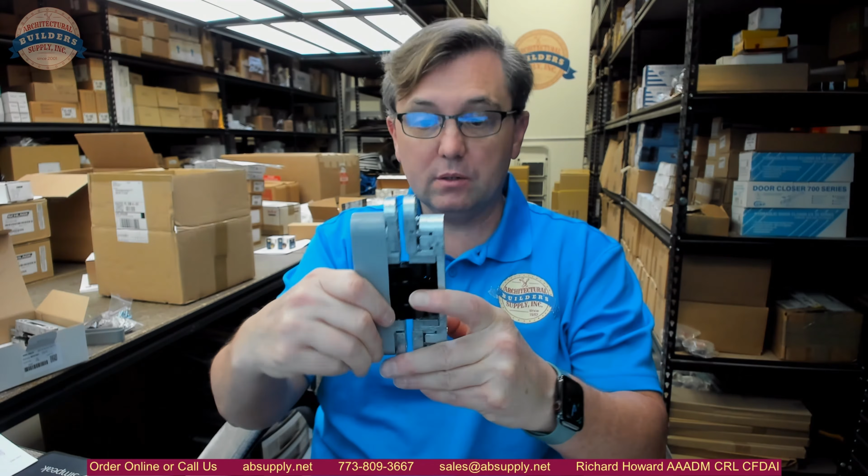I've reviewed other concealed multi-adjustability hinges from other people, and they all pretty much work the same way. They're going to allow you a little bit of adjustment this way, this way, this way, and that's certainly nice to be able to do that. A lot of people swear by the ability to adjust the hinge after installation. You know, the bottom line is if you're installing it exactly per the template, there's no need to adjust.

The issue with that logic is, you know, things fatigue with time. A door moves a little bit. The hardware gets a little worn, and now it's not perfectly straight. And I would look at the ability to adjust as a double-edged sword. What is that hinge like maintenance-wise when you add the ability to adjust? Do the adjustments themselves come loose, you know, at year 10? Does the hinge fatigue to the point where you can bring the door back up or however you need vis-a-vis those adjustments and it being a worthwhile sort of product?

I've really never seen a concealed hinge like this fatigue with time. I did coincidentally see one yesterday, not unlike this hinge, but the entire assembly of laminated plates literally sagged from one leaf to the other. And I said to the contractor, was someone doing chin-ups on the door? And he may not have understood what I said, but then proceeded to tell me that it is a door that has a bookcase on the back, and he knows that the owner's children literally crawl up to the top of the bookcase and sit on the bookcase, likely adding 80 pounds to the weight of the door.

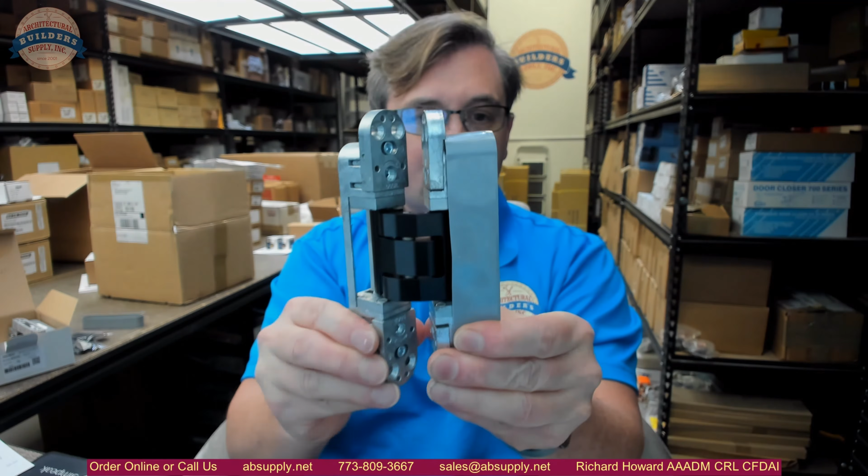The other downside is that you have to think about special templating when doors are hung on these hinges because of the vertical axis of pivoting and how it floats. That silver pin represents how the axis of pivoting actually moves through a slight arc through the opening and closing cycle. A hinge barrel, that vertical axis of pivoting is plumb, doesn't move at all as the door opens and closes. With concealed hinges like this, they do.

You have to be mindful of your other hardware. And what I'm in particular thinking of would be overhead stops. If you're doing an upscale residence, I've done jobs with concealed hinges and overhead concealed stops. Super elegant because you've got a large apartment in Manhattan where you have a relatively large space, but everything is kind of compact. And you'll have conflict of doors opening into a commode, opening into another closet door,

floor stops, hinge pin stops. You're building a $4 million condo. You're not using $3 hinge pin stops. You can't use them with this, obviously, anyway. So you have to be mindful of how a concealed hinge with a floating vertical axis of pivoting will affect your other hardware. Overhead stops is the piece of equipment that comes to mind.

So let's continue on, switching to the screen view, and let's go over the extended description, its hinge capacity, what you're going to use and when. We're going to dive into the documents. We're going to talk about how to install it. I've mortised for these. Like I said, the first time I did it, I spent a half an hour looking at the template. I was, in my mind, incredibly sure of what I was about to do. I did it, and it worked perfectly. And after that, you graduate right to expert level. So let's move on to the screen view of this video.

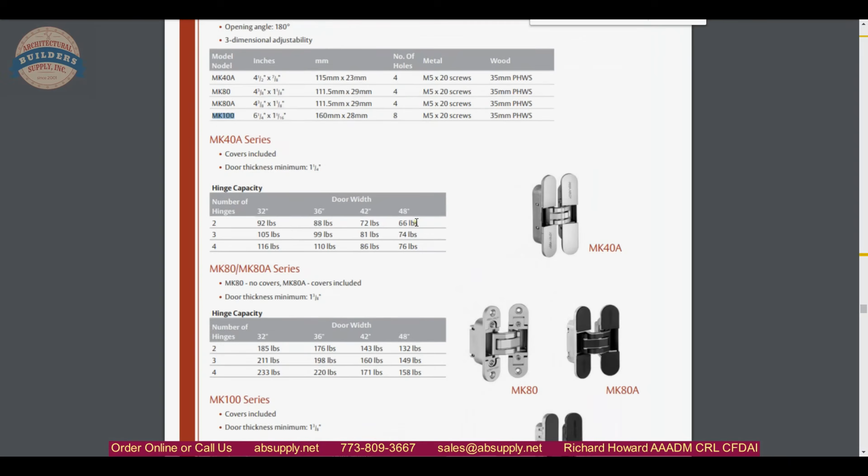Okay, so here's the item that we're looking at, and let's dive in and take a closer look at it. The MK67001. First, what I want to do is take a look and see what other options they have. I thought that they had more than just one option on that hinge, but it's not coming up. In their catalog, they call it MK100. There they are. You just have to know what to call it to find that it'll come up. So they have a variety of concealed hinges.

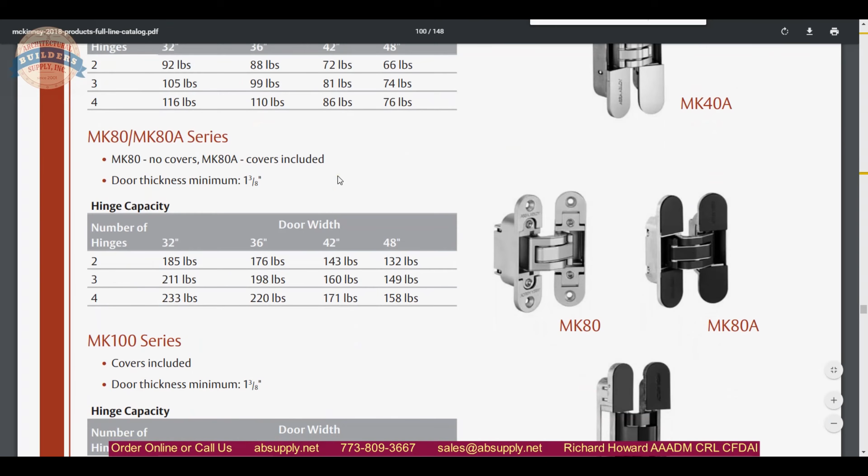This document is very handy, and I'm sure that this is linked to down below. Different weight capacities is really what you're dealing with. And what is nice about these hinges is that there is a relationship between the quantity of hinges you are using and the total possible weight of what you'll hang. The good news is, doors that you're faced with, 3070, 3080, 4080, typical 1 3/4 hollow metal wood doors, they don't exceed what these hinges can handle generally, okay?

Even if you had a 4080 solid core door, a 4080 solid core door is going to be 4 times 32 times about 6 pounds per foot. So that's not right. I said 4 times 32. I meant 4 times 8. 192 pounds. So even a solid core 4080 door is not going to exceed what they're meant to handle. Okay, so you're probably going to be in good shape.

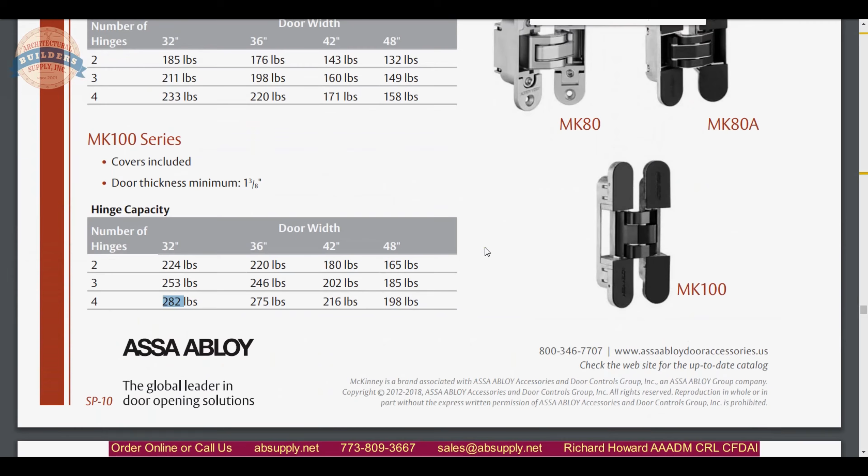What's nice about hinges like this is where they stop working in terms of door weight, other hardware stops working too, like door closers. Door closers that are surface mounted don't work well on doors that are 250 pounds plus. So this catalog cut is really nice because it will show you quickly what's happening with these other hinges. Okay.

Refined minimal, 3-dimension adjustability, easy installation. That's subjective. They're easy to install. You have to know how to mortise them, and you'll be able to do that by the end of this video, I hope. And door alteration. Snap-on covers conceal set screws for a clean aesthetic. This is certainly a concealed hinge. The base material is zinc.

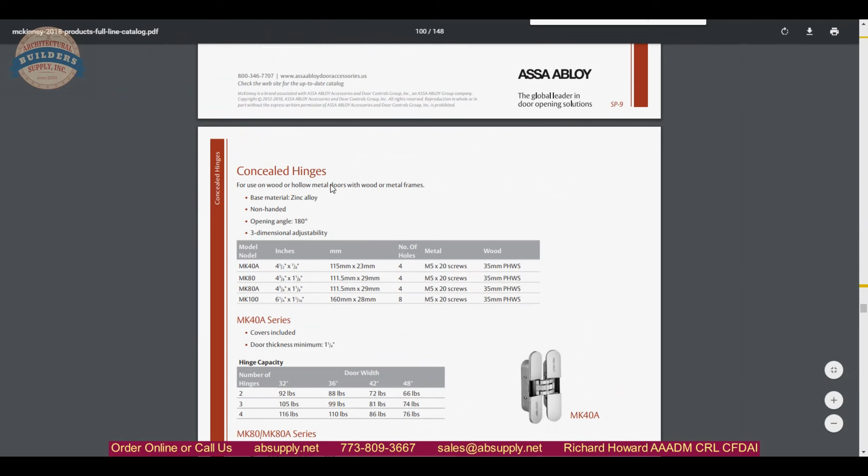Now, where you'll get into trouble with hinges like this is there's one thing that is conspicuously missing. And what is conspicuously missing is no reference to UL listing. So the problem that we have here is using these on fire-rated doors. So that would certainly be a downside of this material.

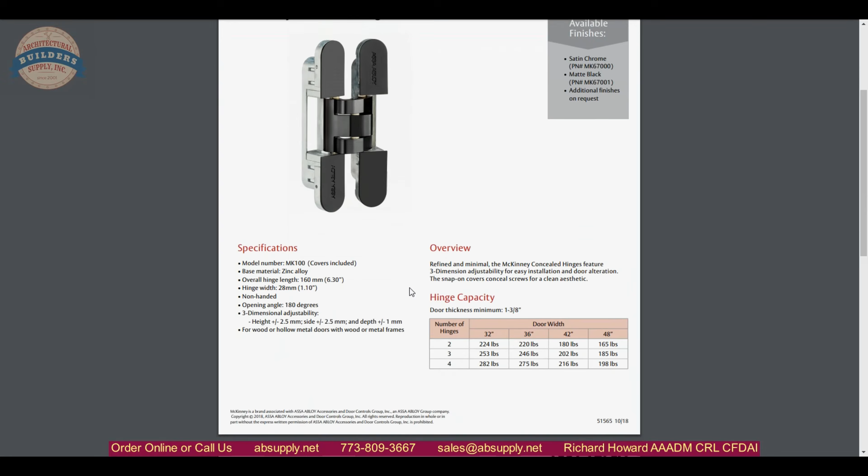Unfortunately, you won't. Using this on a fire-rated door would be expressly prohibited, is the bottom line. Now, I don't think you're going to encounter that problem often. The trouble is you'll have a client who will want to use these hinges throughout a space. And the issue is the majority of the doors will not be fire-rated, and you might have a couple that are, which puts you in a position of not being able to use a beautiful concealed hinge like this throughout. Okay, so be mindful of that.

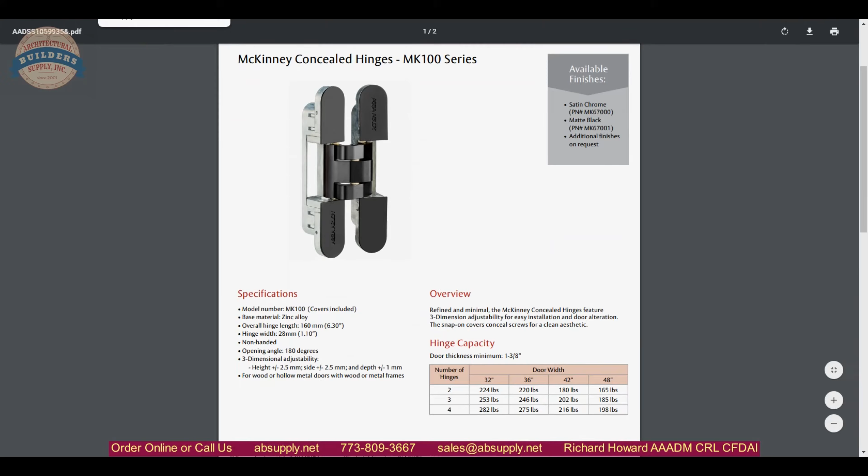Let's get back to our description. Matte black, that's the color of this hinge. An overall size, and we're going to dive into the installation instructions and go over all of that. These are non-handed. They can swing left or right, left-hand reverse, right-hand reverse bevel. 180 degree is permissible on the degree of opening of the door, provided that there is no conflict with casing, a wall condition. The hinge itself will go to 180. Okay, with the adjustability here expressed in millimeters. We'll show that. We'll demonstrate that.

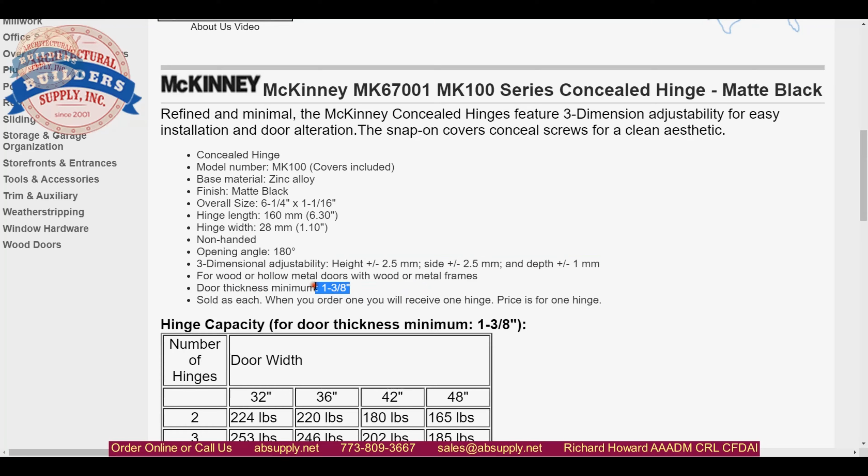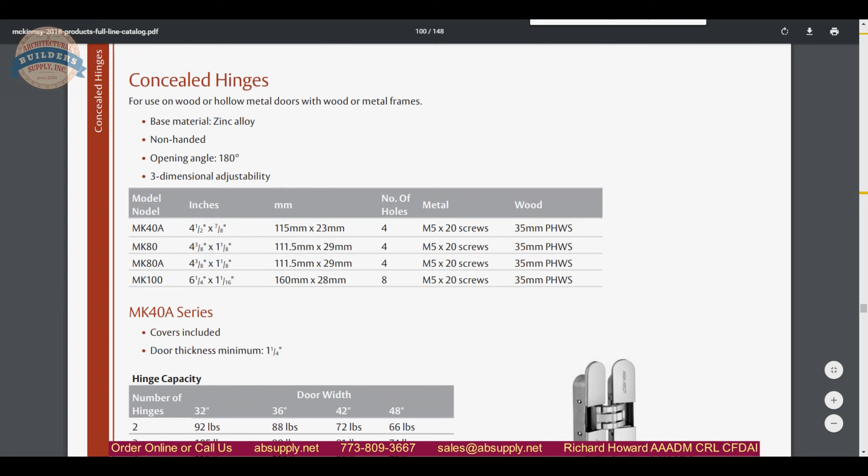You can use it on wood or metal doors, wood or metal frames. Your minimum door thickness, however, is going to be 1 3/8 for the MK100. Okay, they have their other hinges here that will allow you to get to thinner doors. The MK40, 1.25 inch, MK80, MK100, 1 3/8. Okay, your door weight capacity, which is here as well. Now let's move into the supporting documentation.

Okay, so we're back here at our supporting documentation. Let's click on product brochure. That's going to, of course, show us an overview of McKinney hinges. And that's a nice document because, quite frankly, it's going to show you hinges that are depicted in a very consolidated 8-page document, and will take you through a tour of really cool hinges that you may not have known were available.

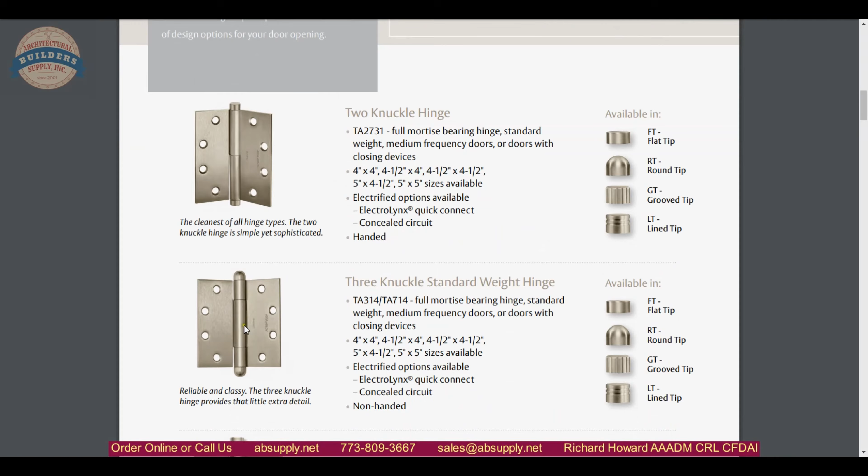And what I mean by that is McKinney will give you these 2-knuckle and 3-knuckle hinges along with a heavyweight version. However, the standard weights have these beautiful decorative tips. Modern decorative tips, not your typical ball tip, urn tip, steeple tip, acorn tip. These are quite modern. These aren't your grandfather's decorative tips. Okay, so you'll continue through here. Then you've got a 5-knuckle standard weight. This is, of course, your go-to hinge.

Modern options compared to the classic, the most common ball tip, steeple tip. That's nice too. You don't see those all the time, but they're kind of cool. I think you need to have more of a Victorian look to have steeple tip, but use it. If you like it, that's good enough. Heavyweight version, so a much thicker hinge. Decorative 2- and 3-knuckle hinges.

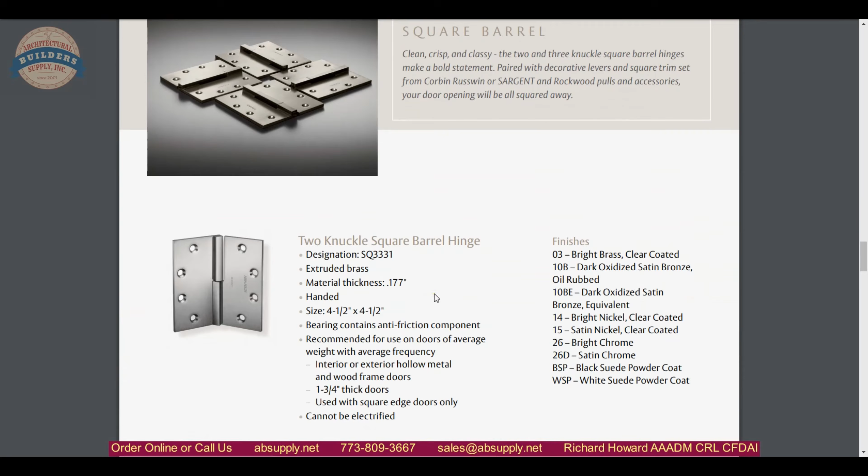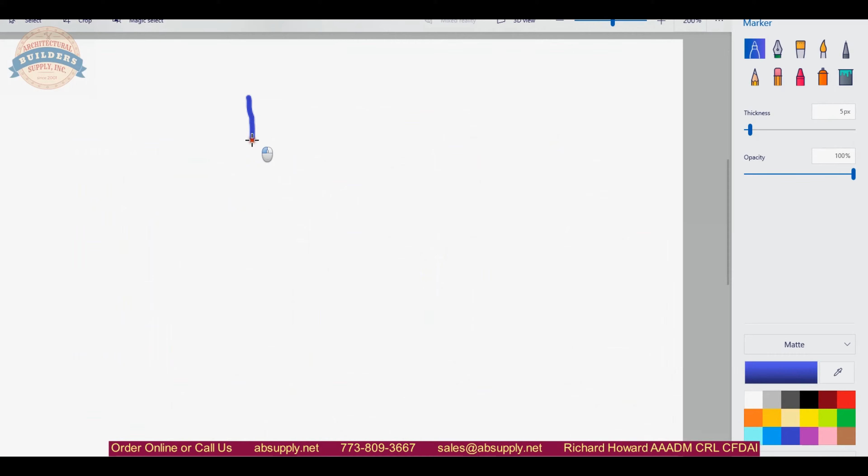Now, these are cool. Square barrel hinges. They don't really show a great picture of these here at all, unfortunately. But here, let's just try this. A square knuckle hinge, from a cross-section perspective. Okay, so when you look at that door in elevation, all you're seeing is this really cool square profile.

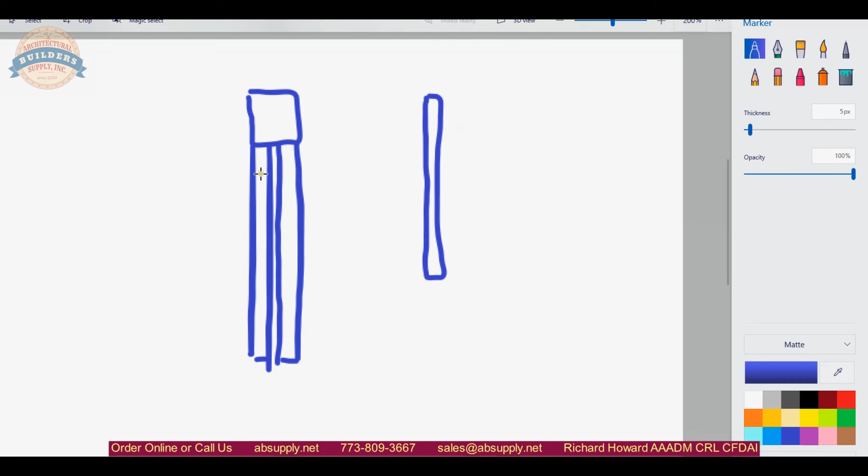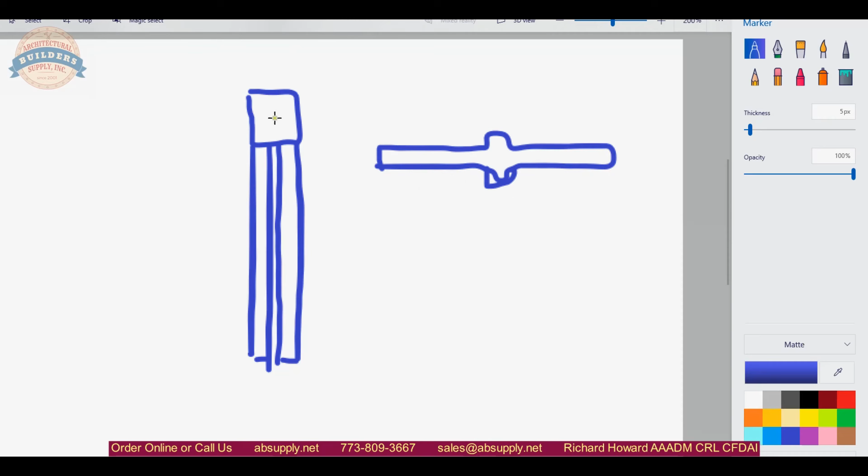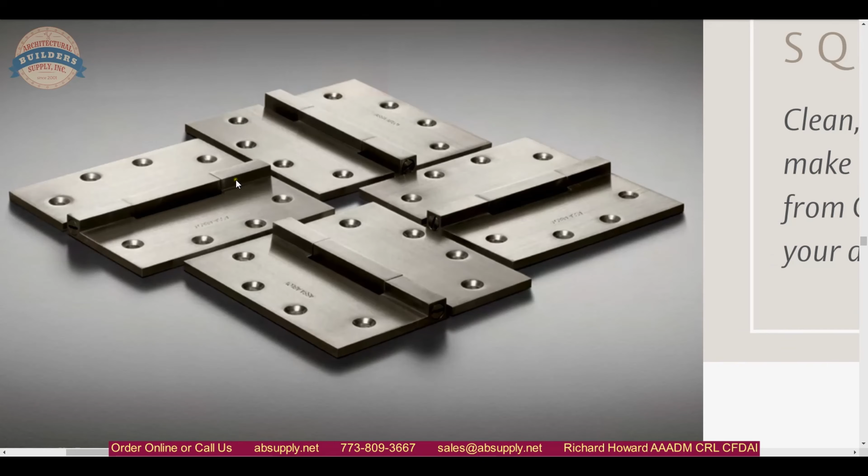The factory does need to know if your doors are square-edged or beveled, because the swag that they will put on the hinge leaf is dependent on whether it's square or beveled, because you don't want the hinge to be disjointed, for the barrels from each leaf to not be completely in line with each other. So if you use your imagination with these square barrel hinges, you can see it a little bit better here. These need to be lined up, and the swag that they're going to put on the hinge leaf underneath is going to be based on square or beveled edge. So be sure to qualify that.

I did 1 or 2 jobs with these. They were really cool. Don't sell a lot of them. I wish we sold more because I think they look great. Now, we move into their concealed hinge offerings. Their olive knuckle hinges, which are really cool as well. That's very much a 19th century sort of hinge. But what really drives home how beautiful their architectural hardware looks is what they're doing here. Black suede powder coat, white suede powder coat. They're accommodating these requests for these custom finishes.

There was a marketing document put out by Assa Abloy, who is the parent company of McKinney, Rockwood, Pemko, Sargent, Medeco, Yale, Corbin Russwin, Norton, on and on. And that document basically said, get a piece of paper and email us what you're looking for, your custom idea. And if we've got the machinery to make it, we'll be happy to. And we'll probably be able to give it to you in any finish you want as well.

So in this regard, McKinney, a la Assa Abloy, making all of these custom variations, these beautiful derivatives from standard builder's hardware, to attempt to meet the demands of the market is, in my opinion, a renaissance.

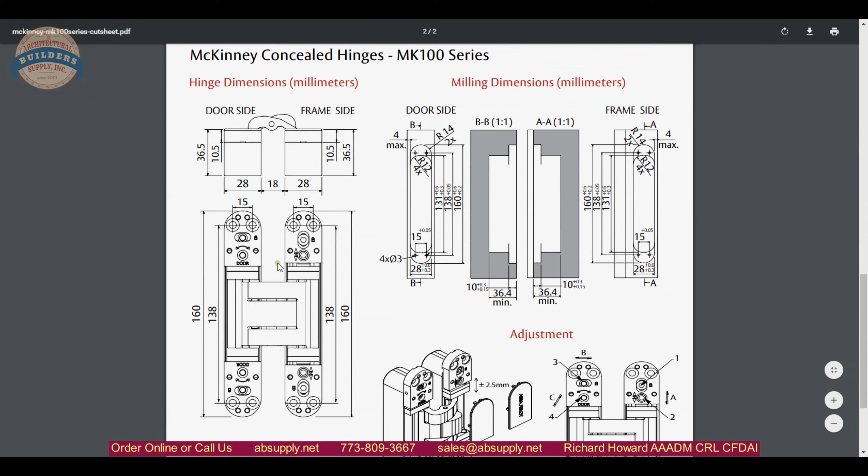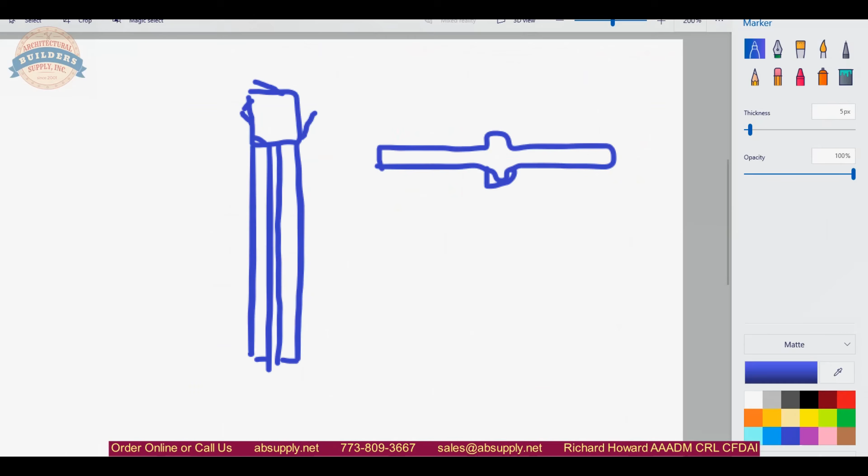Okay, a review of everything we've discussed. We'll also touch on some basic dimensional properties, because these are questions that are asked immediately. What size is it? How big is it? I'm seeing obviously things in metric here, so converting is going to be important. If you are of a certain age and you don't speak metric, that is understandable, because I didn't either. But we have to work in this ever shrinking world.

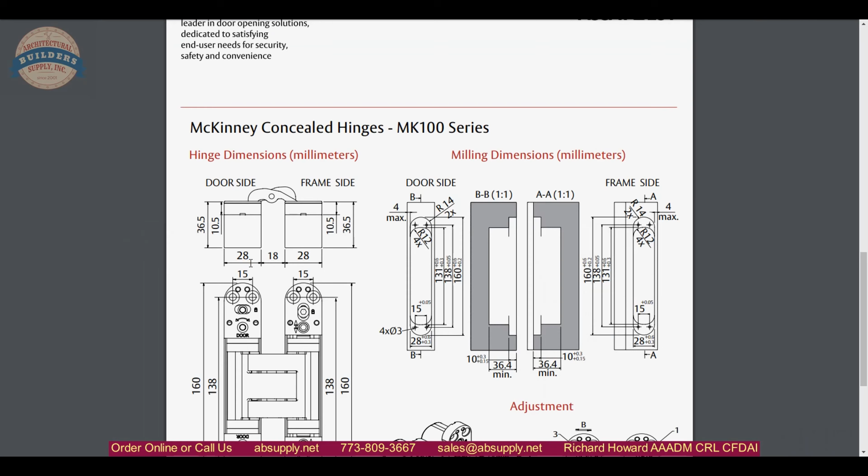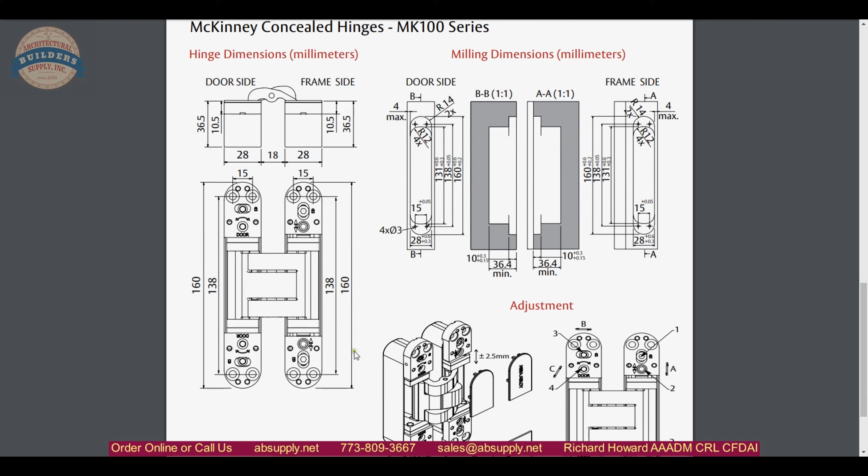One thing that I like to do, for those of us that don't find metric our first method of measurement, let's just say 160 millimeters overall height. Okay, great. I don't know, how big is that? A foot? A mile? So it would be 160 divided by 25.4. 25.4 millimeters per inch. Doing the math, that's 6.29 inch. So what are we really looking at here?

6 1/4 is 6.25. That would be 6 4/16. That would be 6 8/32. That's going to be about 40 thousandths bigger. So 6 8/32 would be like 6 9/32. Well, 6 9/32. Okay. So if we went 1 divided by 32 times 9 plus 6, that's going to give us 6.28 inch. So that's going to be really close to that.

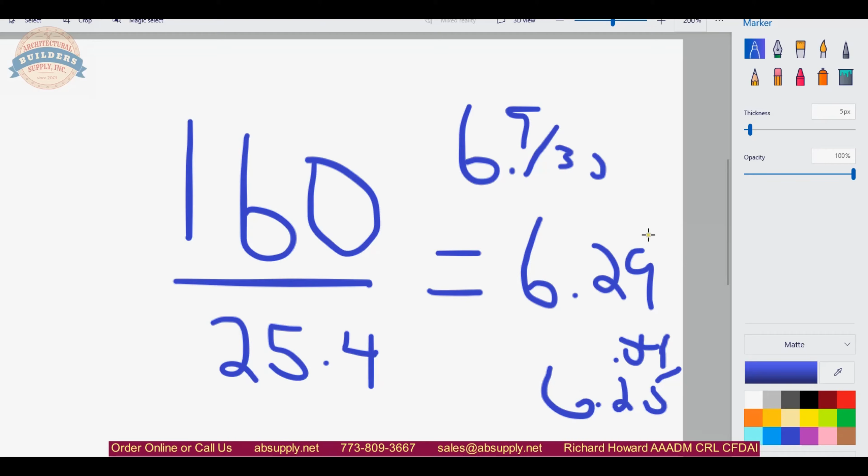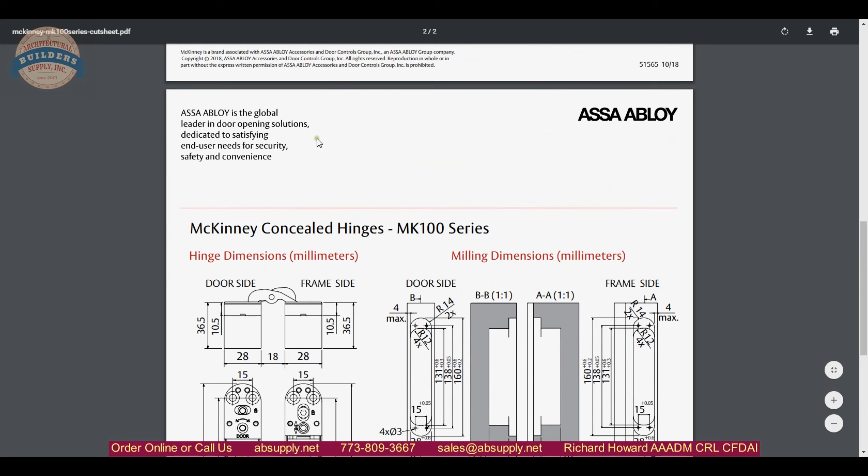So that's just the methodology I use to go about converting things from metric to imperial. You know, whatever. We have to work with the information given to us. Being a very European hinge in origin, we can understand why it's in metric. But there you go. Okay. Installation and structure, or a dimensional overview. And indeed, the next document for us to get to is going to be our installation instructions. Oh, that video is there. Okay. There you go. Very handy.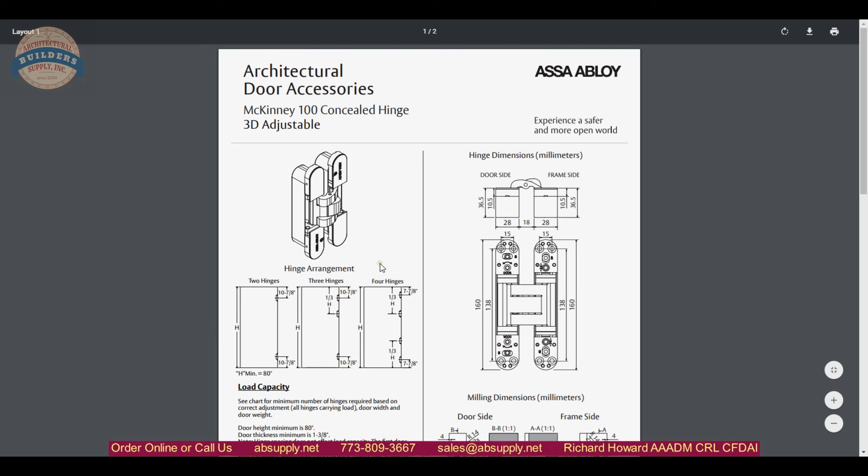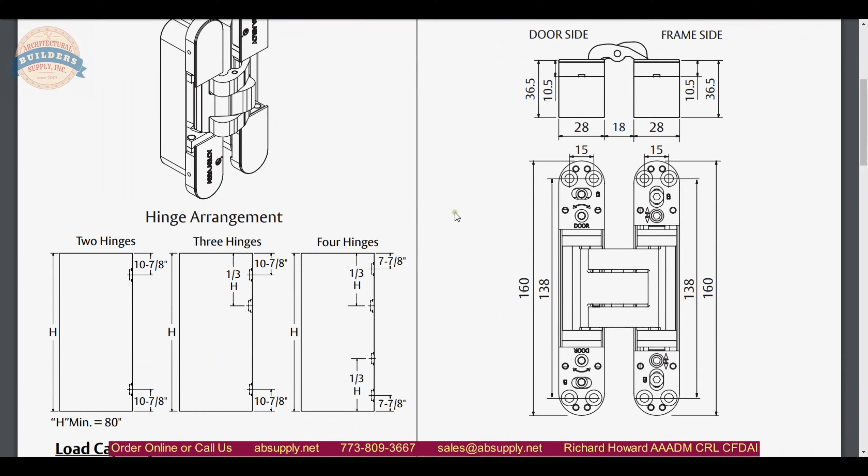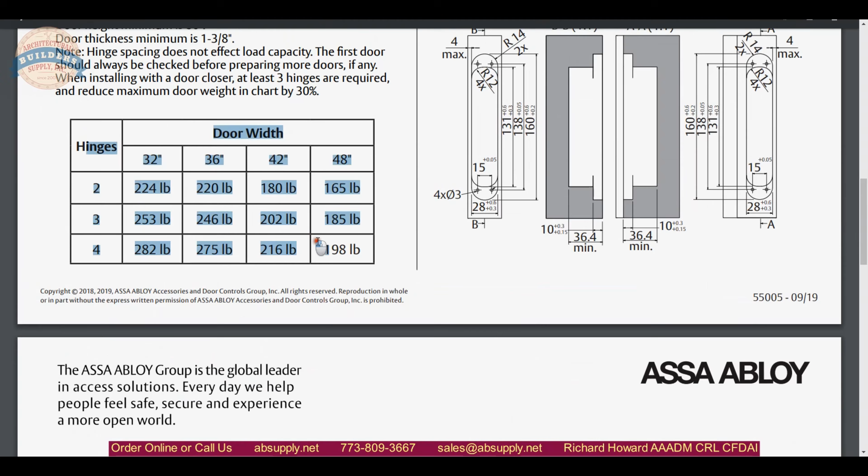Installation instructions. Let's just dive into it. We do indeed have our installation instructions pulled up here, and McKinney does a good job of really distilling this down into the essence of what it is that we're really dealing with. What's important to know is that it's atypical in terms of installing these hinges in most applications, meaning typical construction, and the way that the hinges have been tested is compliant with how they're asking you to position them. 2 at the top is what they're saying.

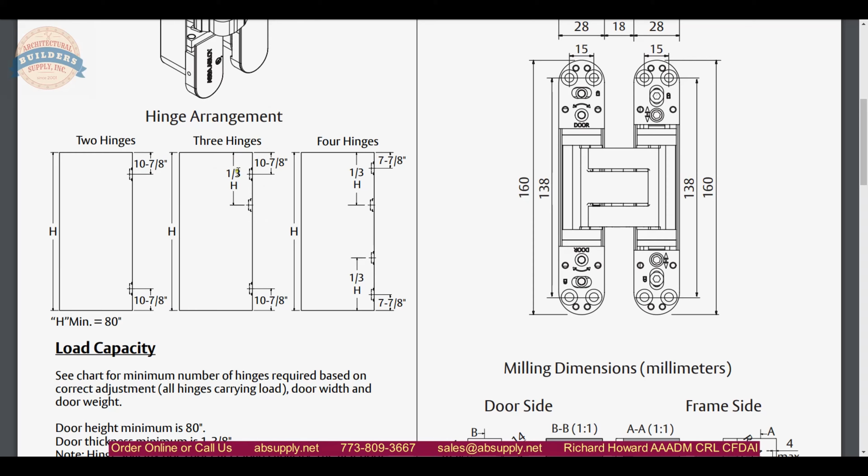If you're in Europe, or on a cruise boat, because many cruise boats are manufactured in European shipyards, you'll always see 2 hinges at the top, and that is the opposite way of how we do it. Unfortunately for us and our pride, this is the better way to do it, because 70% of the weight of the door is hung on that top hinge. So you really want to have more hinge at the top of the door than being in the middle. It's more effective at carrying the load when it is closer to the top.

They're saying 1/3 from the top. It would not harm you to go further to the top. However, I would absolutely follow the guidelines of what the hinge is calling out. The issue that we have, though, is if you're doing wood doors, and you very likely are, I would get it in writing from your wood door manufacturer that installing your door with these hinges will not violate their warranty. The rope that they could use to hang us with would be that the door is improperly hung. So I don't know if this hinge is defined as improperly hung.

So you'll want to be clear and upfront before you order 30 doors for these hinges, and you've got 5 of them that are warped. And then the door manufacturer comes in and says, well, I'd love to help you, but you don't have the door properly hung. And that's just a very, very bad position for all parties to be in the middle of.

So I would clarify that, and I say that because I've been involved in those types of conversations where, yeah, it's center hung pivots. The manufacturer's not going to warrant that door if it warps. And sure enough, 1 out of 10 doors are warped in my experience, my actual door manufacturing experience.

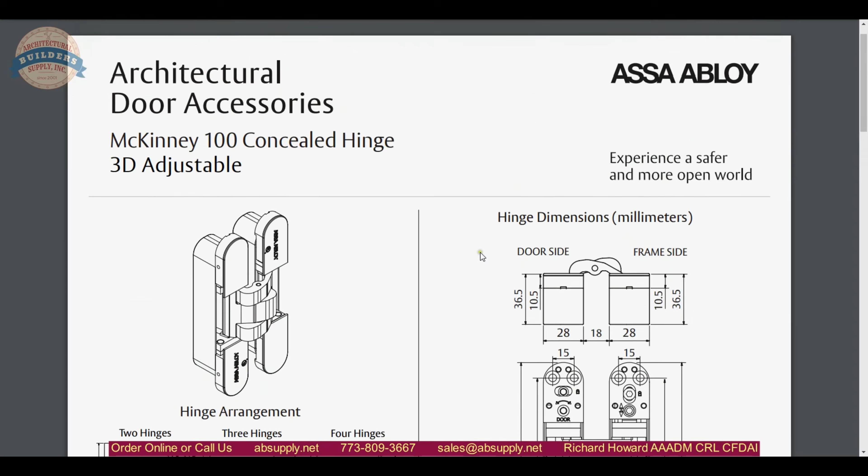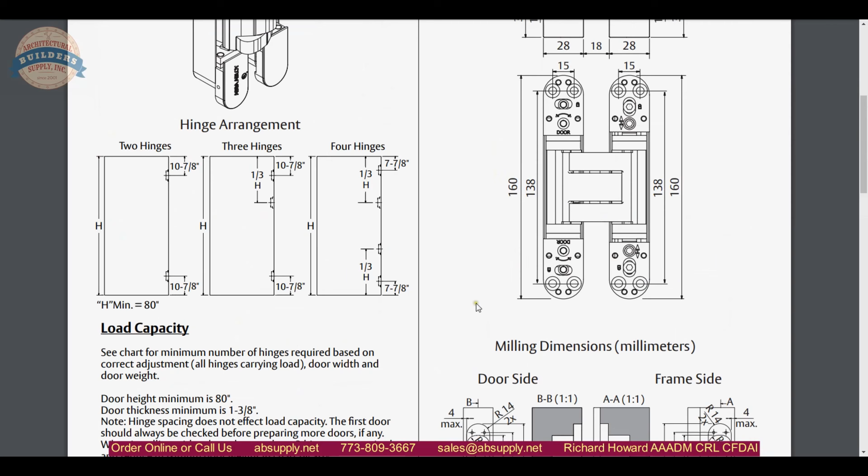So as we get our overview of what we're wrapping our head around, here's your hinge arrangement. Here are your dimensional properties. Okay, these dimensions are important to know, but it's when we get down here where they're really important to know. Actually, everything we need is right here. Okay, so minimum door height is 80 inch. Door minimum thickness is 1 3/8.

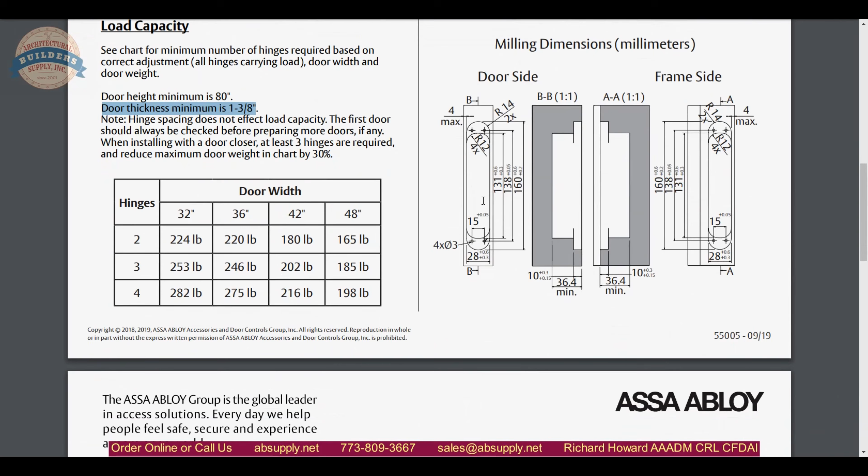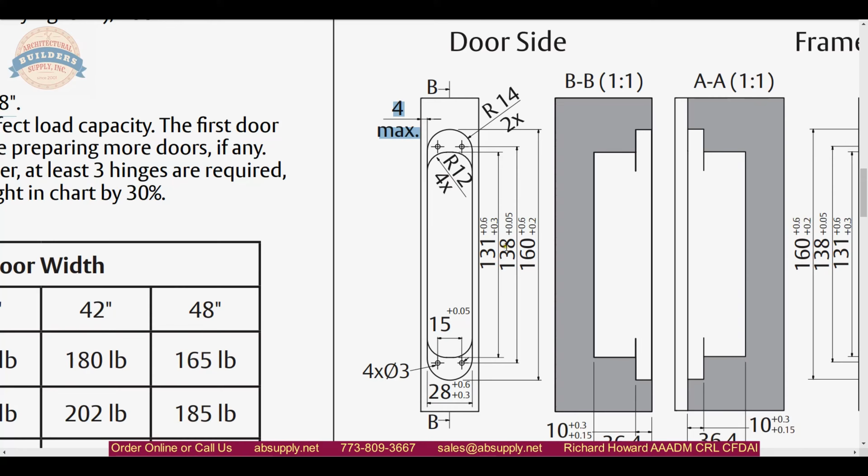You can hang a 15-inch thick door on this. It doesn't matter, in the sense that you need to observe a hinge backset for this to work on all these hinges, and where that comes into play is a 4 millimeter maximum backset. So provided that you observe that 4 millimeter maximum... switch back to this. Here is a rough drawing of that hinge.

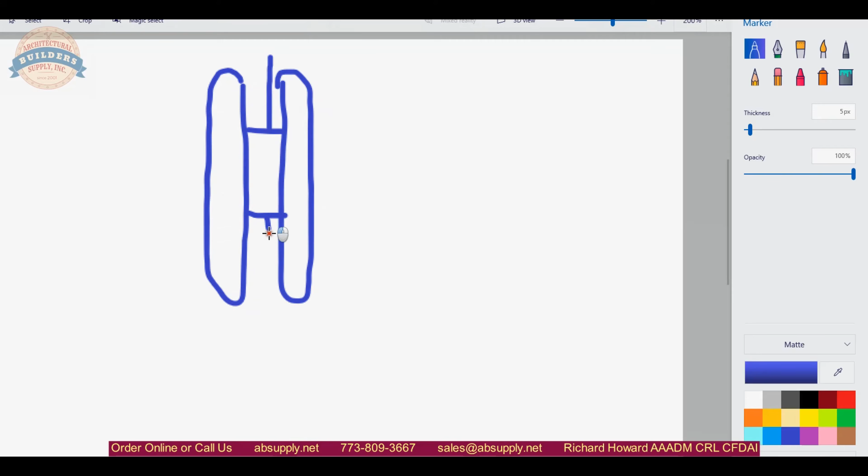Okay, your door is going to come in here at your door, and that's your frame. The dimension in here cannot be exceeded, otherwise the hinge isn't going to open. So they have to have the hinge leaf fairly close to the edge of the frame and the door in order for that to work, and the maximum dimension of that is 4 millimeter.

If you made that larger, you would definitely find yourself in a position where the door will not articulate into its opening cycle, because the hinge is installed so far that the door will make substantial premature contact with the jamb. Hinge spacing does not affect load capacity, so that's an important note to have. The first door should always be checked before preparing more doors. When installing a door closer, at least 3 hinges are required, and reduce maximum door weight in chart by 30%.

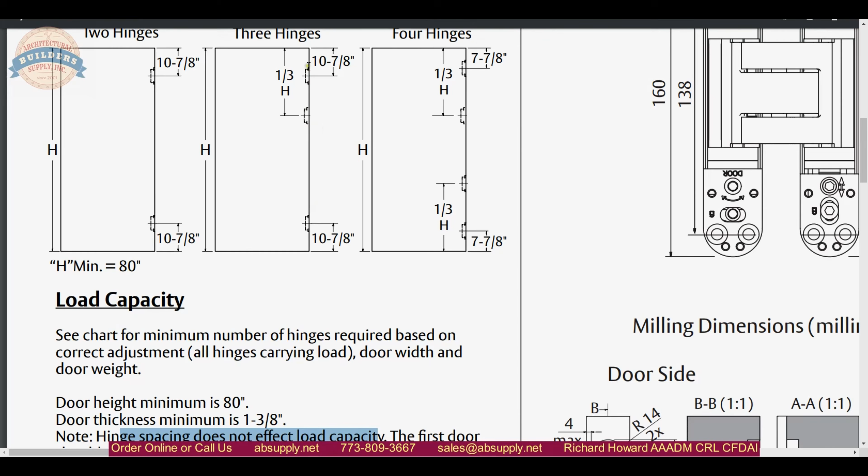So they're saying if you're going to put your hinges in the traditional top, middle, bottom arrangement, that does not affect your capacity. I would say, though, it would affect the hinge's ability to be as efficient as possible. If you were to install a hinge here, here, and here, and then top, middle, bottom, and cycled it for 20 million cycles, I think you would see different wear patterns on that top hinge. Does that really matter? Probably not. But they're calling it in this arrangement for a reason, while also saying you're not going to affect your capacity based on hinge spacing.

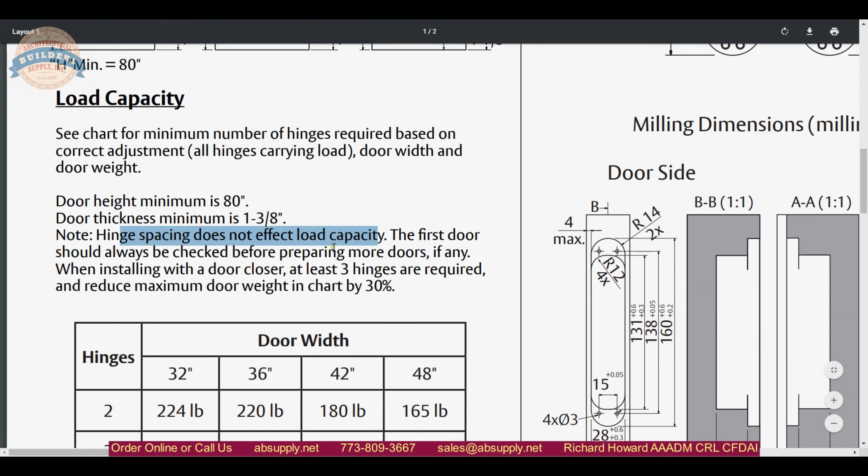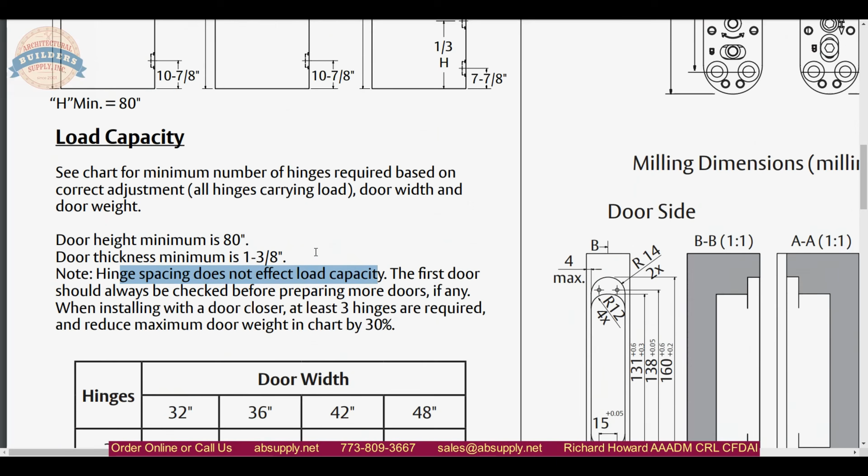Now, obviously that is to be taken with an understanding that you're going to install the hinges at a standardized location. If you put one here and one here and one here, you could definitely affect the operation of the door. Now, why are they saying a door closer reduces the weight capacity by 30%? Because a door closer puts substantial additional force onto the hinges. So if you have a door closer installed, you will need to adjust these numbers by 30%. So be mindful of that.

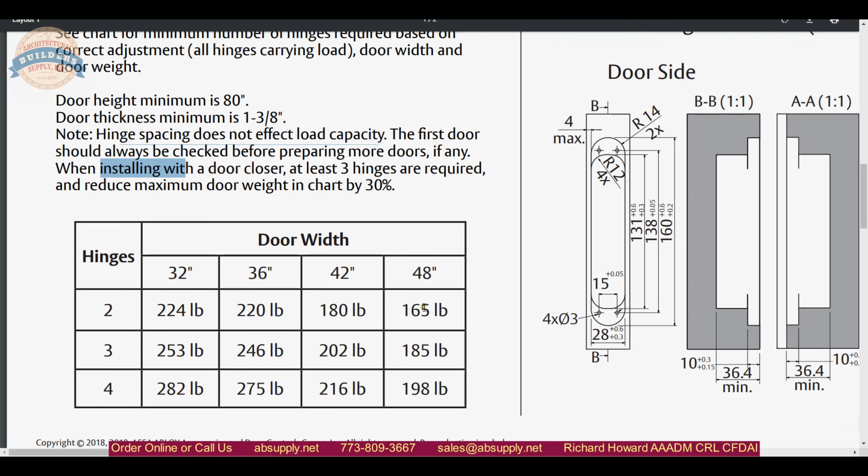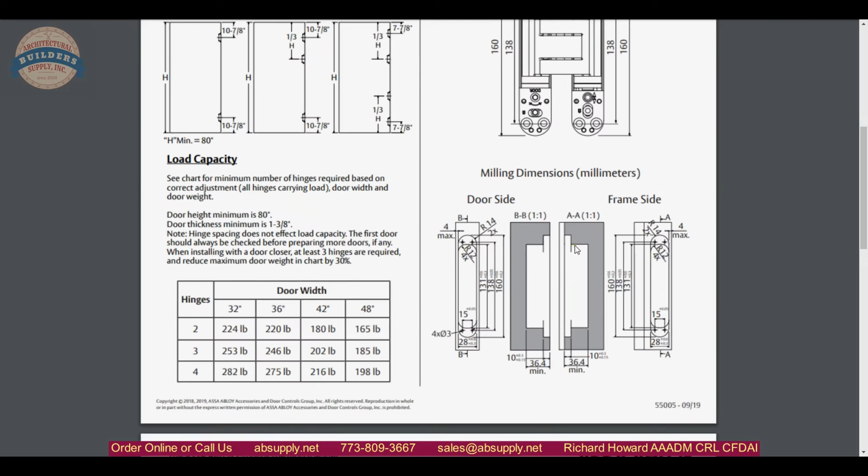Okay. Now let's move into an overview of these dimensions and talk about how to go about actually machining the material, really the mortising. The installation is basically a two-step prep, meaning you just need to make the preparation in the edge of the door and the frame look like this in cross-section, with this width of 28 millimeters. The overall width from here down to here is your 160 millimeter. This 138 millimeter tells you the center of your screws, but you're not mortising anything for that. You've got 28 millimeter wide.

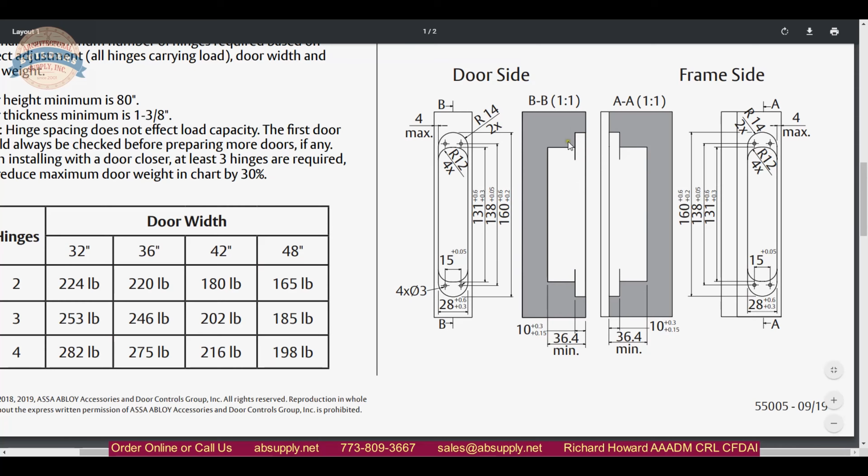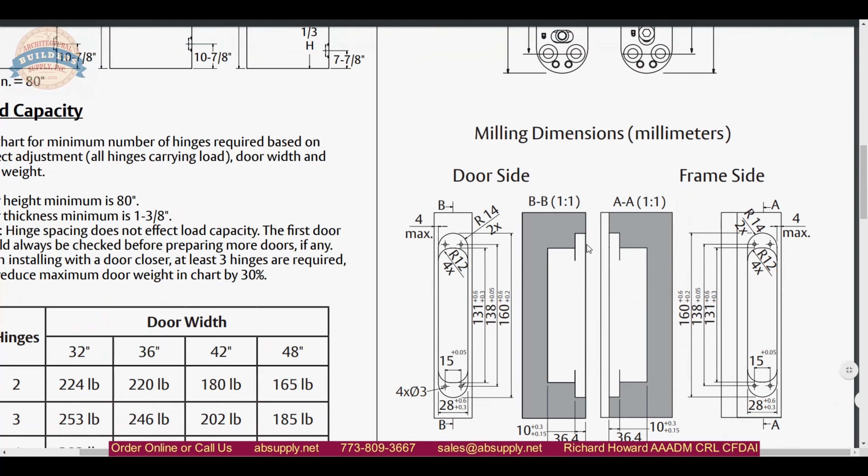You have two dimensions here because you have two preparations. We're going to call this shallow one the plate, and this deeper one the body. Your body prep is going to be 36.4 millimeter deep, and your plate prep is 10 millimeter deep. The question becomes, what is the length? We know this is 160 millimeter here to here. We know it's 28 millimeter wide. What's our next dimension? Well, it's literally right here.

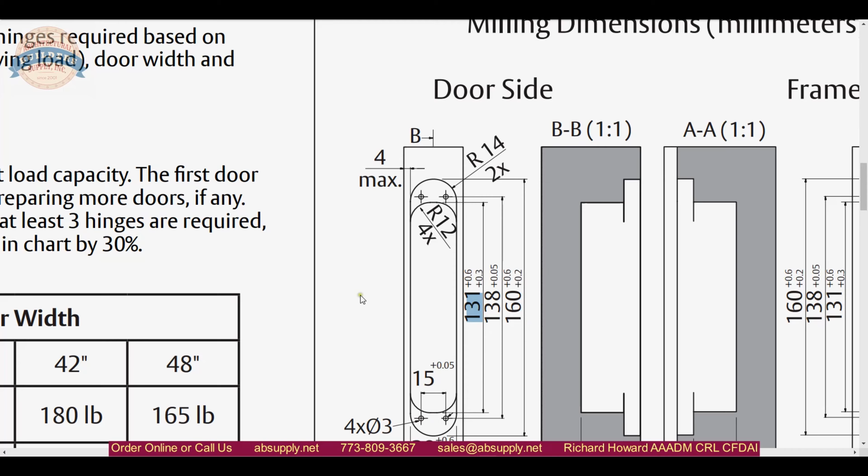131 millimeter from here down to here. So you need the 160, you need the 131, and that's going to be on the same center line. You know that you've got 28 millimeter here, and now you have your two depths, 36.4 and 10. What I would do is I would print that installation instructions out, and I would convert all that to imperial if that's what I was dealing with, and I would simply move on from there.

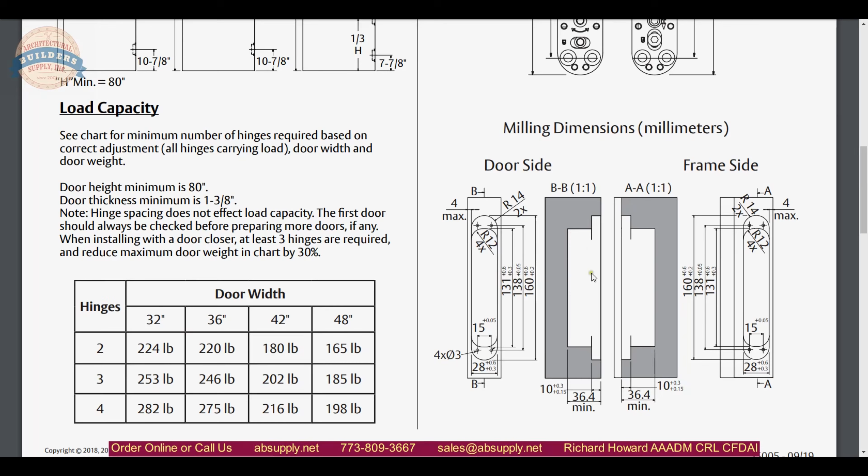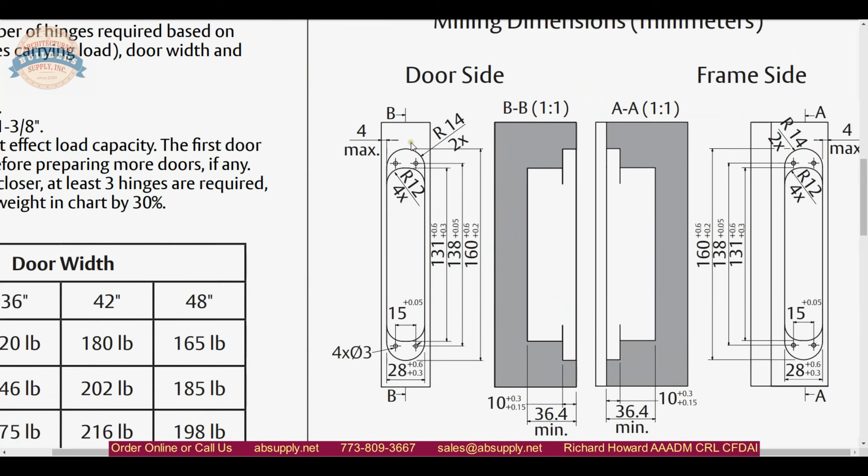If we digest or break this down, it's pretty simple. That 138 millimeter, that's awfully nice to know because you're certainly going to pre-drill your holes, but if you're a hollow metal door manufacturer, yeah, you need to know that in order to find out where all that stuff is. Now the B dimension, let's see what the B dimension is. I'm thinking that is a reference to the center line.

Okay, so again, 28 millimeter, 36 and a half they said earlier, I think, or 10. This is really crucial, that 4 millimeter max from the face of the door and the face of the frame to the hinge prep. So they're clearly showing, I believe that they're clearly showing, they certainly are. When you look at the hinge as well, there's no inset on this. There's no inset at all.

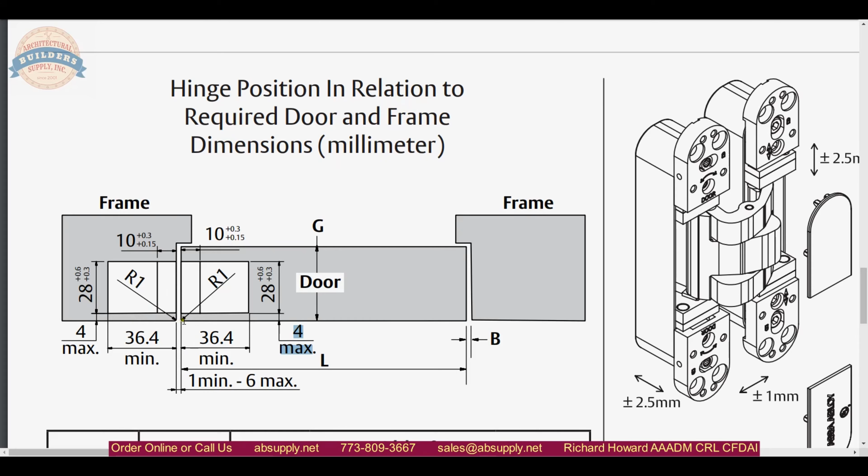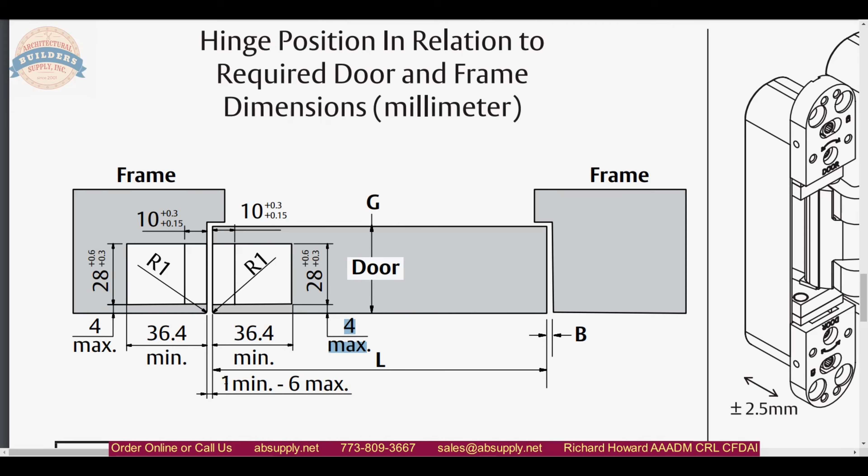That R1, they want you to break that edge slightly. They want a little bit of detail taken off there. They want a broken edge there. 1 millimeter to 6 millimeter maximum. You're going to achieve that based on your adjustability, which we'll go over shortly.

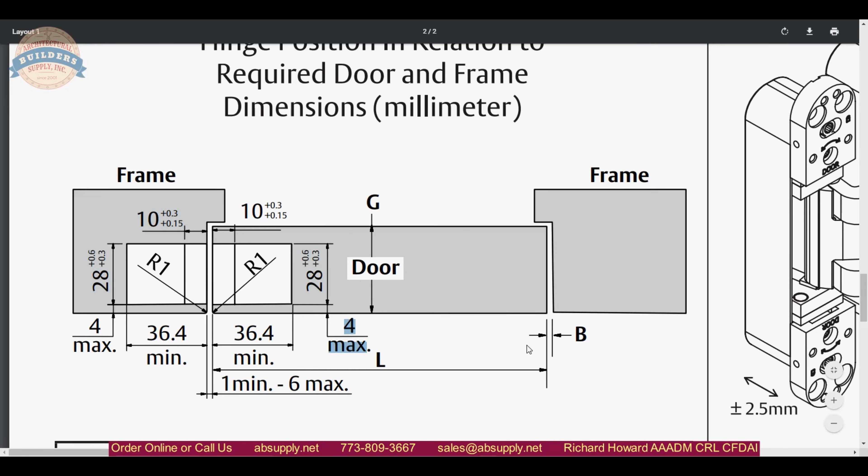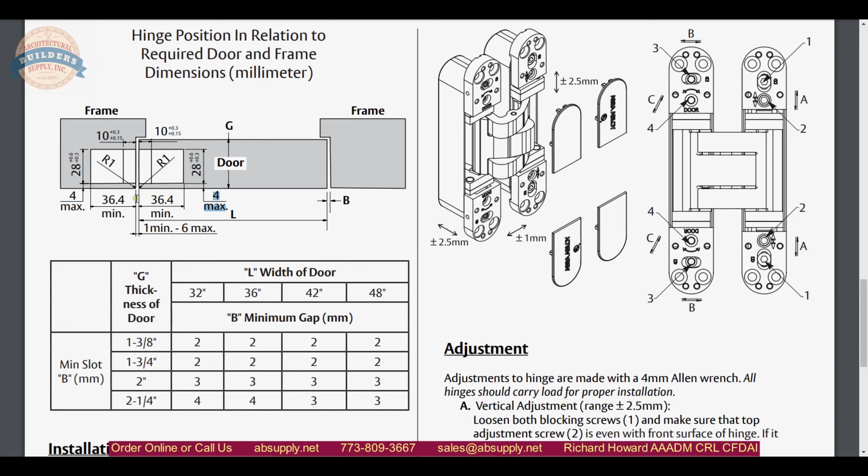This dimension here, they're just telling you the gap between the edge of the door and the frame. You know, 1/8 of an inch is what you're going to need for typical hinge construction, except because of our floating vertical axis of pivoting, adherence to the minimum gap required is important because that vertical axis of pivoting really arcs through, doesn't it? It comes in like a half of an ellipse. In a normal hinge, your vertical axis of pivoting will be here. Well, this vertical axis of pivoting kind of does that, right?

So that's why as you go to a thicker door, you need more of a gap because your door, as it cycles open, kind of moves in this direction as it opens. So the door moving in this direction and then opening is kind of an exaggerated way to demonstrate why that gap needs to be heavier.

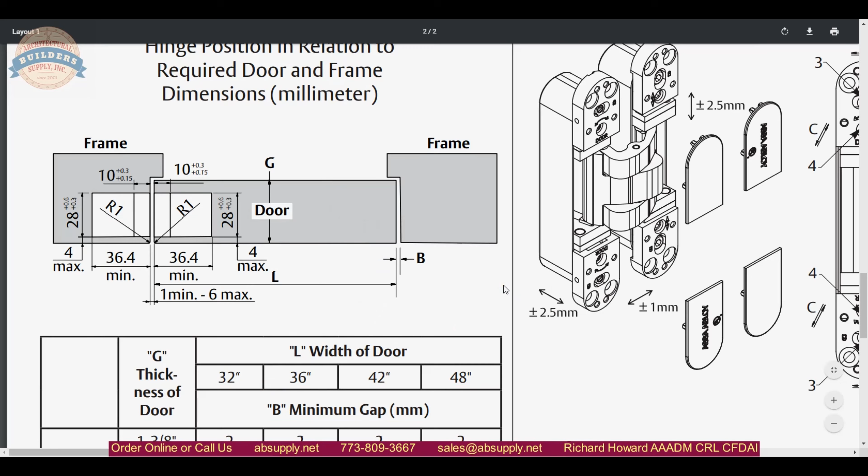Looking at the rest of the installation instructions, I don't see anything else that we need to cover. A 1 millimeter radius is what they're looking for there. You're obviously going to need to pick router bits that are going to be compatible with what you're doing, and that is certainly how I would go about mortising these. I would use a plunge router. If I'm looking at the edge of my door laid out, I'm going to take my plunge router and I'm going to do just a deep prep like this.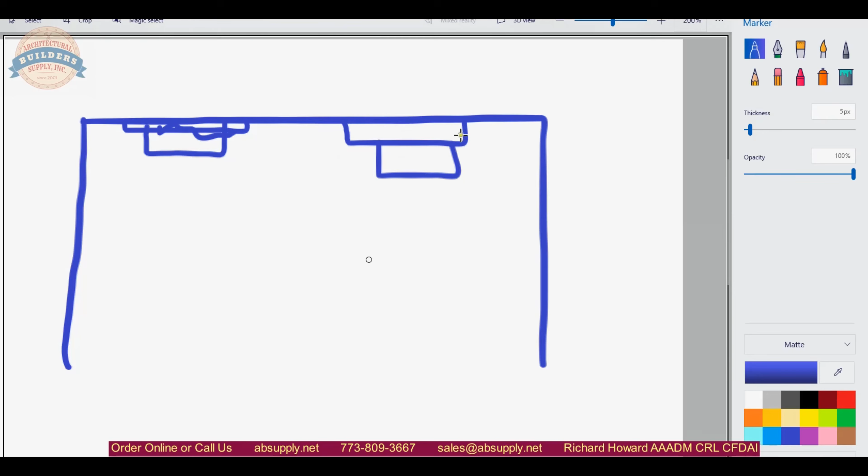Okay. Then I would come in and do an additional prep just across here, except that all this is already gone. So I would not do this prep and then this prep. I would do the deep work first because as you are working with a heavy router, with a very quickly spinning router bit, you want to eliminate the possibility of nicking the door by doing that finished plate work last. One out of 500 times I'm mortising a door, I say to myself, boy, I'm glad I did the deep work first.

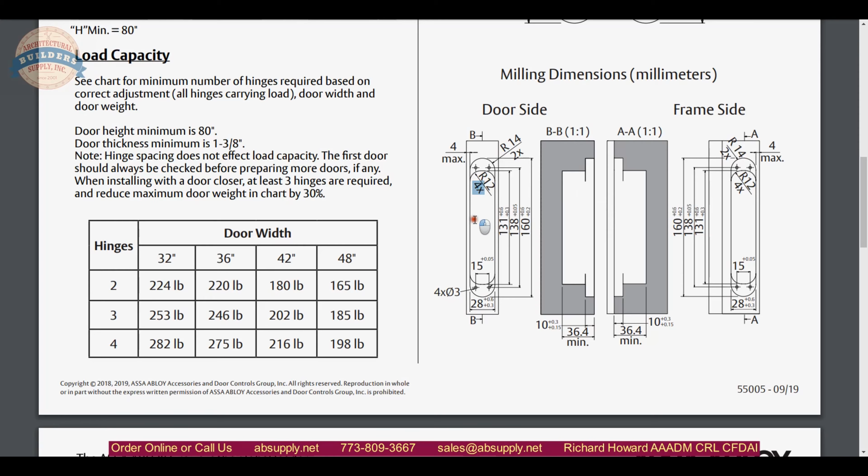In particular, not so much an issue with these hinges because they're 28 millimeter for the depth of both preps, the body and the plate prep. But if this body prep was a little bit smaller and you had a shoulder inside of here, that would kind of help you when you're doing the plate prep second.

So now we move into the hinge adjustments. I've looked at installation instructions from other people who do three-way, 3D adjustable hinges, and they do a good job at showing you what you are literally adjusting. So you have the ability to adjust vertically, you have the ability to adjust laterally, then you have the ability to adjust in depth.

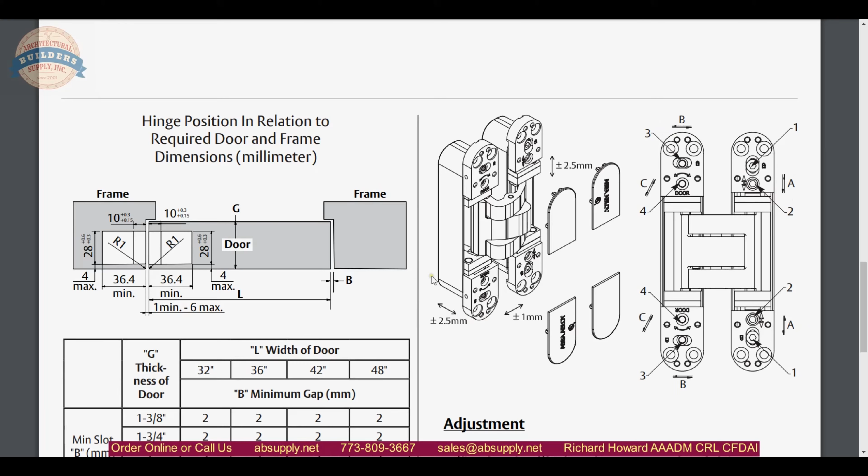So the next thing that we're going to do is grab a hinge and our 4mm Allen wrench, and we're going to demonstrate how the adjustments are. Vertical adjustment, 2.5 millimeter plus or minus.

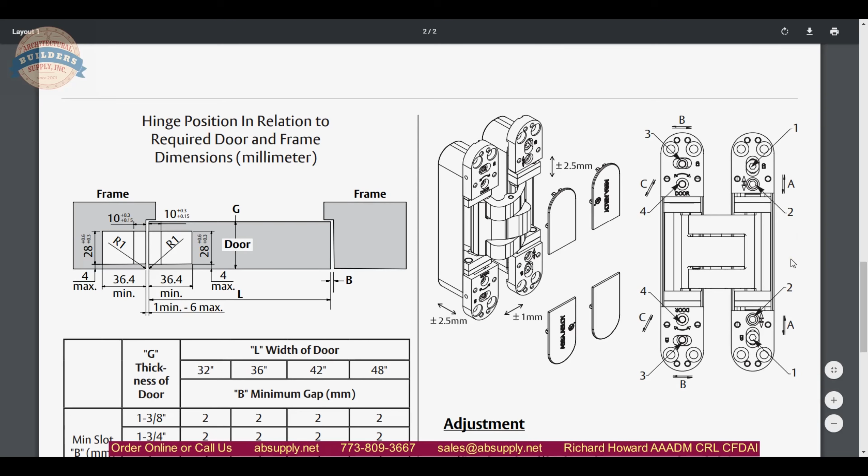And there's instructions on how to make this work, and we'll go over that. Your depth range. Now the depth range, you know, if you're mortising your doors properly, if everything is on center, adjusting vertically should not really be required. But it is nice to have that depth adjustment for the eventual sag that all things do in time.

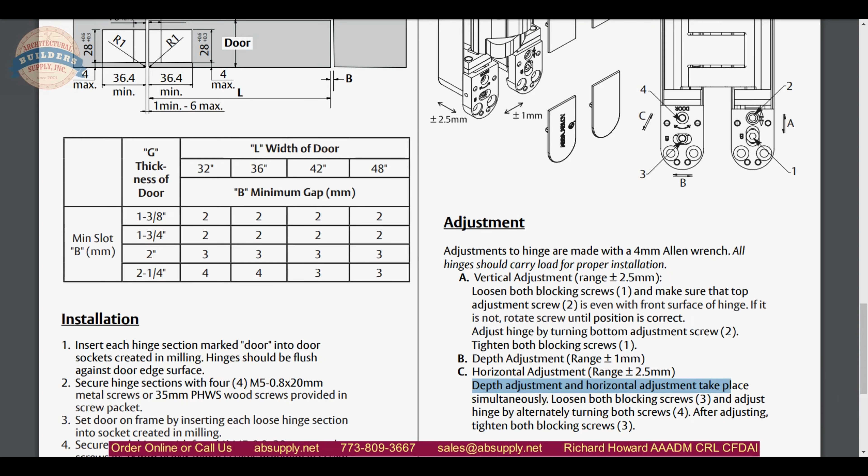Or a door that used to be a perfect rectangle is now more of a parallelogram, the opening. So adjusting your depth can help kind of keep the door working better. So in that regard, having the ability to adjust may not be a negative thing at all. Depth adjustment and horizontal adjustment take place simultaneously. Loosen both blocking screws and adjust. So let's switch the view back to the camera and let's actually adjust the hinge in real time.

Now, if you still have those installation instructions open, let's go over adjustment step A. First, adjustments, and I'm reading it here. Adjustments to hinge are made with a 4mm Allen wrench, not included. All hinges should carry load for proper installation.

Okay, I think what they're saying is the hinge actually has to be under load so that you can adjust and see. Doing it here in my hand, I'm not going to be able to manipulate screws and see the door move. It's got to be under load, you know, but we'll get the concept here. Step A, vertical adjustment in A, loosen both blocking screws. Blocking?

Or maybe locking screws. And make sure that top adjustment screw 2 is even with front surface of hinge. If it is not, rotate screw until position is correct. Adjust hinge by turning bottom screw 2, then tighten the blocking screws. Okay, so this screw and this screw are what they're calling the blocking screws. We're going to loosen those because that's what locks this in place.

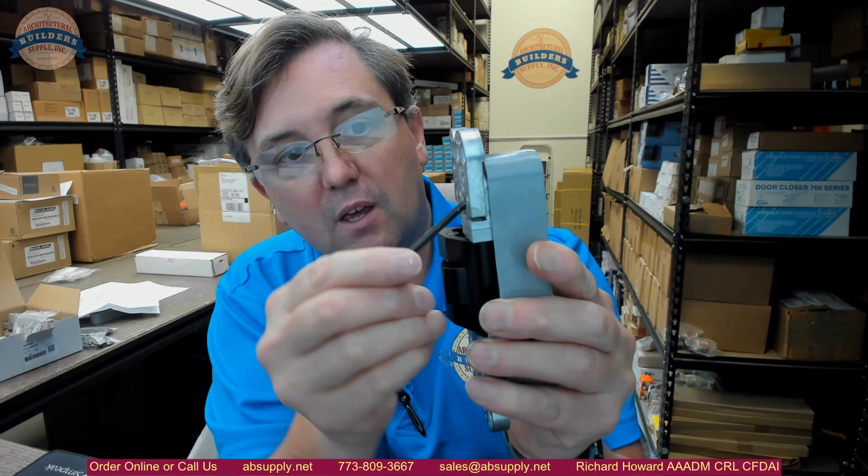Then screw 2, they want it to be flush with the outside of the hinge, and what we have here, it's not, and I'm going to loosen it so that it is. This one already is. At that point, we now have some adjustment that can occur here. Okay? That's where the adjustment's going to occur. So as you manipulate these screws, then you're going to affect a difference in height.

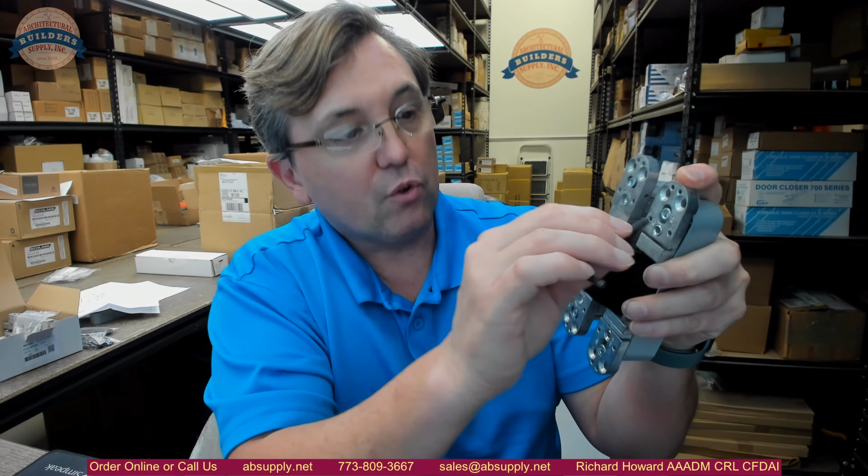Once you have it correct, and you'll need to obviously work them both, you're then going to tighten up your blocking screws to keep those securely in position. Admittedly, it would be better to show this under load, but the manufacturer's original catalog is going to express that. Then moving into B, the depth adjustment range. B is depth adjustment 1 millimeter.

Let's take a look at that. Okay, so what they're saying is depth adjustment in B, go to C, horizontal adjustment. Depth adjustment is plus or minus 1 millimeter. Horizontal adjustment. So when I think depth, I think the hinge moving in terms of the depth of the hinge. And when they say horizontal adjustment, that's where I'm thinking

depth adjustment. The term depth adjustment, I'm thinking lateral positioning, where you are literally affecting the position of this hinge in the cavity itself laterally, but that's not what they're calling it, so we're going to call it what they call it. Now that'll happen on the other hinge leaf, step C, the horizontal adjustment, and the depth adjustment, your lateral adjustment. So depth, if you're looking at the door in elevation, the depth, like the inset dimension, will be

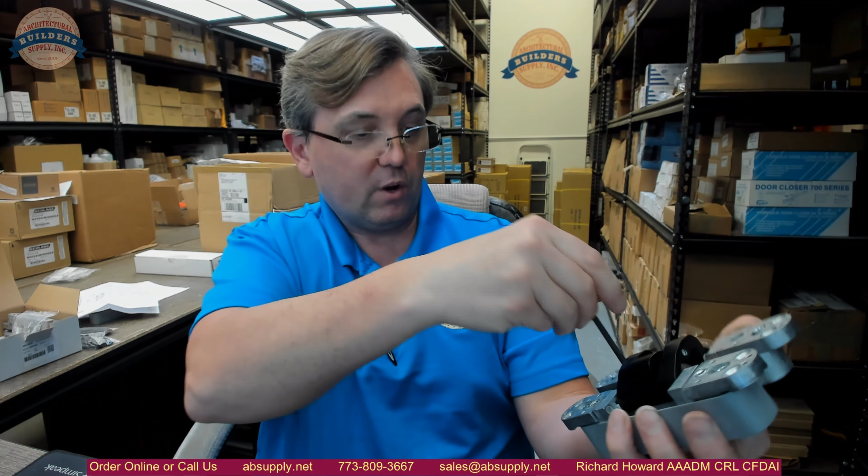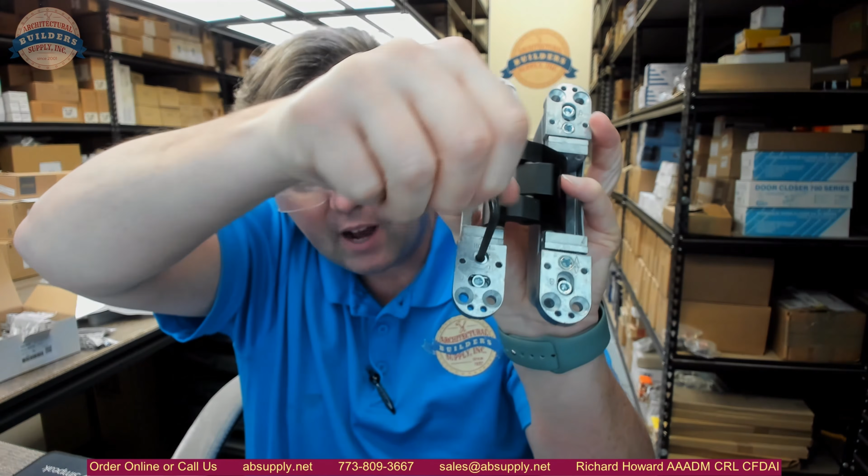Okay, and now here is where I want to look at that. Okay, so that's real easy to see. If you just study the position of this plate, and as I rotate, you can see how that moves back and forth. So you're obviously going to need to affect

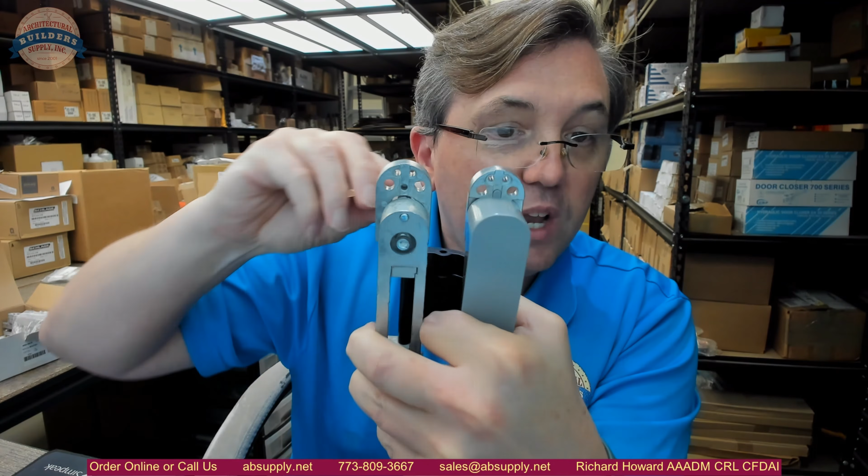Okay, really interesting. So check it out. They say that the horizontal and depth occur simultaneously. Watch this seam here as I back it out. So we know that we're moving the plate, we're shifting it this way. We know that's happening.

But the other thing that's happening simultaneously, now watch what they call horizontal. As the plate is moving this way, it's also moving in depth as well. Okay, so those two do indeed happen at the same time. And once you get the hinge, you'll loosen them both and you'll work them both, top and bottom, obviously, a little top, little bottom.

The other thing you're going to obviously have are your 2 holes here and here for your screws. Okay. You'll be able to adjust that. Plastic dust boxes, those are awfully nice. You don't want the inner construction of your door, your particulate from the wall, creeping into your living space. That's to be sure. Let's see what else we have in the installation instructions that need to have our attention called to it.

Installation. Insert each hinge section marked door into door sockets. So I ought to have said this immediately and early on. There is a frame leaf and there is a door leaf. They are not interchangeable in that regard. However, you know, they can be used in the sense of, you can use the hinge this way. This is the door leaf.

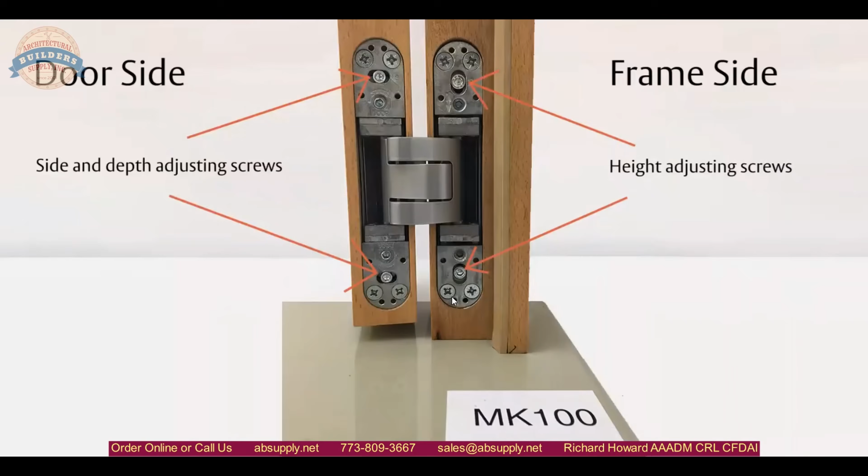A little mini sample that they have. That's awfully nice. Okay, showing how to pop those covers off, obviously. All the covers removed. 4mm wrench to set the door's vertical position. Loosen the blocking screws, is what they're doing.

Obviously, all of them. 2 or 3 or 4 or whatever you're doing. You can't move one without moving all of them. Then you're going to affect your height adjustment screws. He's made a couple of turns, but he has to do it all together to get that to move. And it's a bit undetectable to see what's happening, but yeah, you could see it literally there in that last turn that affected a height change.

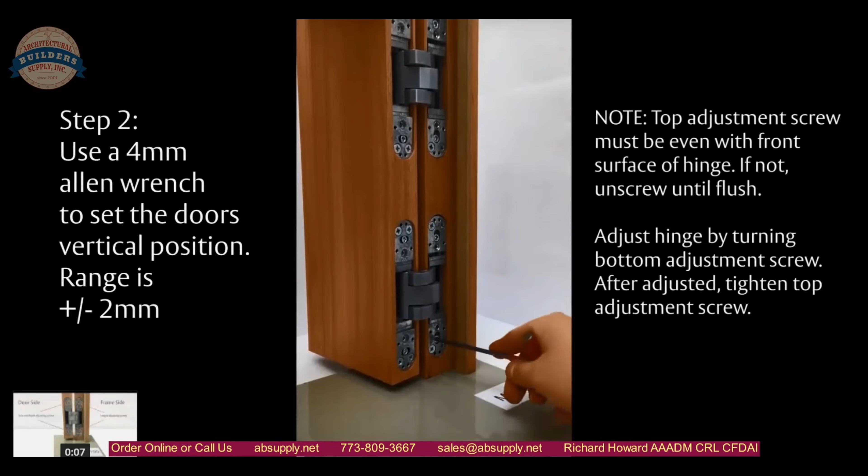Now he's re-securing the blocking screws. Okay. Right here in this video, right at this point, study the movement or the position of that door, right at the bottom. He's about to start to affect change on all of the other screws.

Now let's go back. You can kind of see when I jump back how that door moves. Okay, so we can tell that it's actually moving in vertical height. And that's what they're saying, the door's got to be under load in order to really get movement out of this. Tightening all the blocking screws as we just demonstrated.

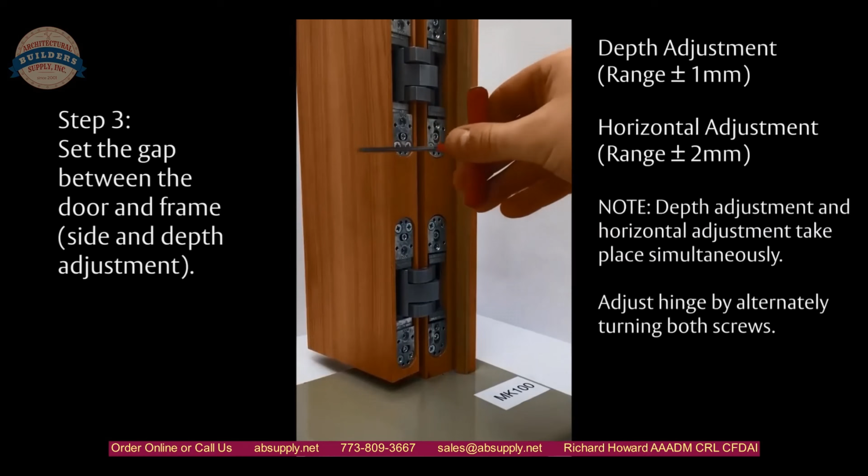And notice how they're being tightened like you would tires on a car. Now, we're going to set the gap and the lateral and the depth. And again, those are being done at the same time. Loosening the blocking screws again. Now we're going to start to set the depth and the lateral movement.

And if you really look at the top, you can see the door starting to just move in that direction. And now you're moving the bottom of the door out as well. Oh yeah, you can definitely tell that that's moving. Moving it back to the original position.

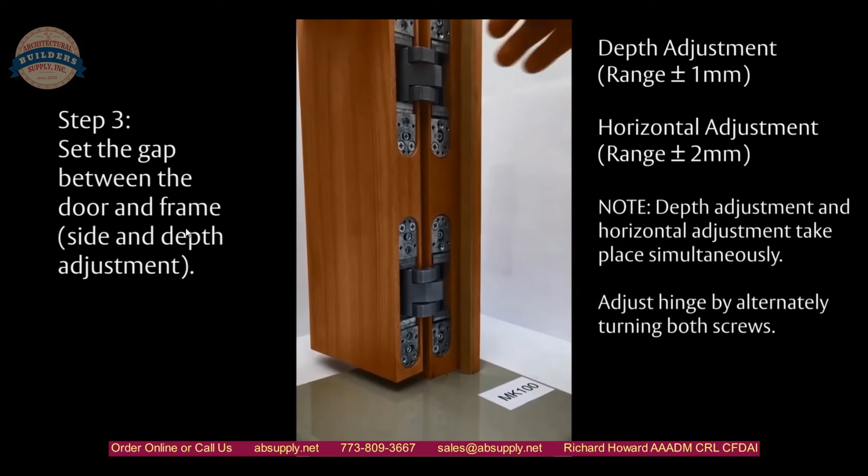Awfully nice to have that T-handle Allen wrench, that's for sure. If you're going to do these a lot, I would invest in a rubber-coated handled T Allen wrench. Now he's tightening the blocking screws, and that's going to wrap up that video. Okay, tightened up, snap covers going back on, and that's a wrap.

Now, in conclusion, these concealed hinges, they're pretty popular. There used to be the good old-fashioned, and they still exist, concealed hinges that are non-adjustable. We all know their name, Soss. And I can tell you over the last 5 years, we sell a lot more adjustable versions than non-adjustable versions. I'm suspect in terms of, as I said earlier, the long term of having mechanical screws holding a door where it needs to be.

Have you ever walked through your house and heard something hit the floor, and you realize eventually, like a week later, you go through a doorway and you see a hinge pin laying on the floor, decorative tips with threads, constant maintenance problem. Things are always becoming loosened. Handles on doors, screws that hold closers in, screws that hold hinges in, always coming loose. So I'm suspect long term.